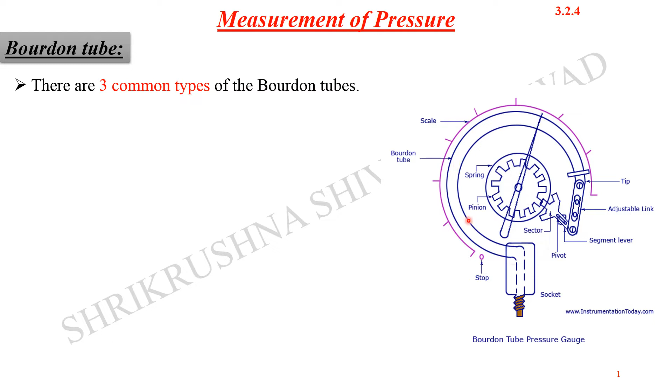In general, there are three common types of Bourdon tubes. You can see the schematic representation here, with the blue shading representing the Bourdon tube. There are three common types: the C tube, the helical tube, and the spiral tube.

These tubes are fabricated with metal alloys. Two metals are mixed together to form the material called an alloy, such as cold worked brass, phosphor bronze, beryllium copper, stainless steel, and nickel alloys.

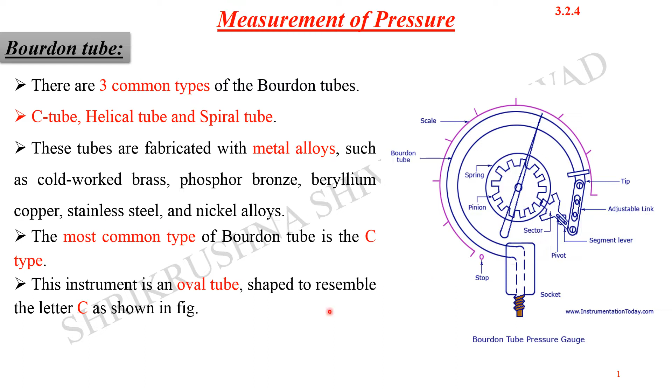The most common type of Bourdon tube is the C type, and in most cases it is a very useful kind of tube used for measurement of pressure. This instrument is an oval tube shaped to resemble the letter C, as we can see from this figure.

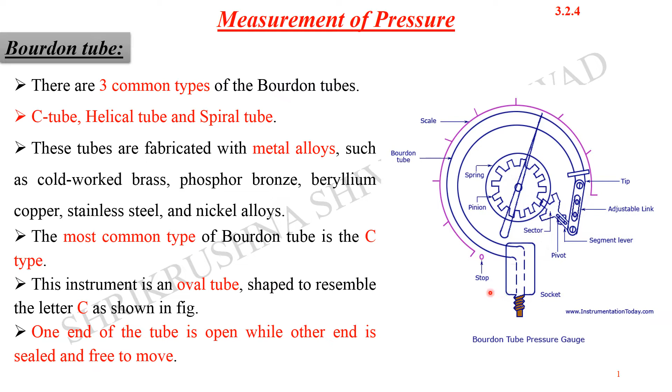Now, how does it work? One end of the tube is open and the other end is fused and sealed. The sealed end is free to move, while the other end is open, where pressure is applied. The open end is attached to the frame or transducer, and the pressure to be measured is applied there. So input is given to the open end of the tube, and the sealed end is kept free to move.

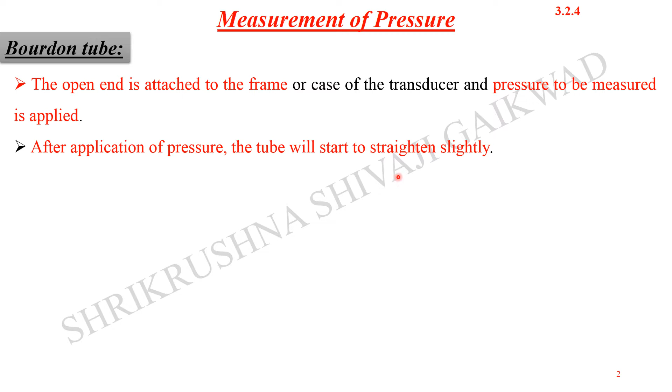After the application of pressure, the tube starts to straighten itself because pressure is coming from the inside, causing the tube to straighten. Or if the pressure decreases, the tube shrinks slightly. This mechanical response is related to the pressure formula - we know that pressure is force per unit area.

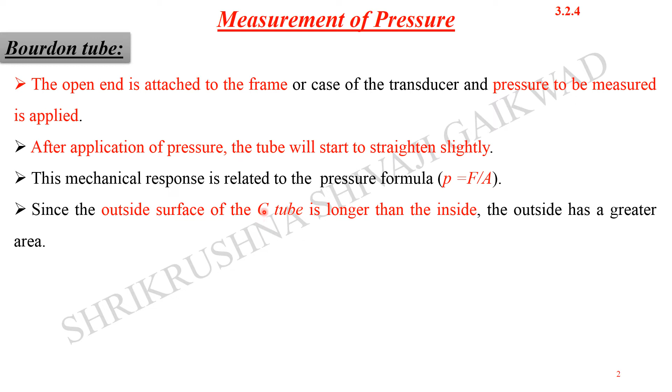Since the outside surface of the C tube is longer than the inside, we can see that if we consider the outside surface as longer and the inside surface as shorter, the outside has a greater area.

Consequently, the force exerted on the outside surface is greater than the force exerted on the inside, causing the tube to straighten. If area is more, then obviously more pressure or force will be required to have the same kind of pressure effect on the inside surface.

As the tube gets straightened, the sealed tip or sealed end will move, and the angular deflection of the free end is taken as a measure of pressure changes. So the angular displacement of the pointer, which moves over the calibrated scale bar, is considered as the pressure measurement.

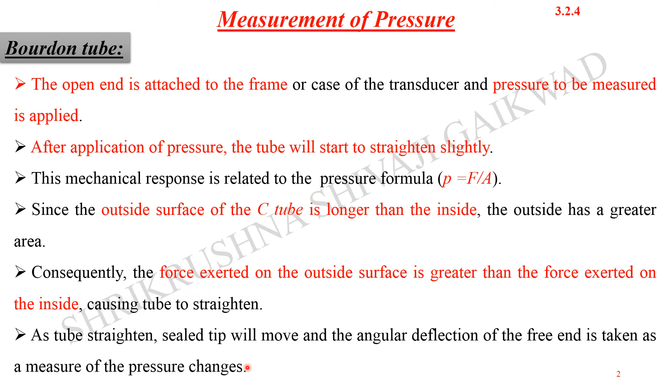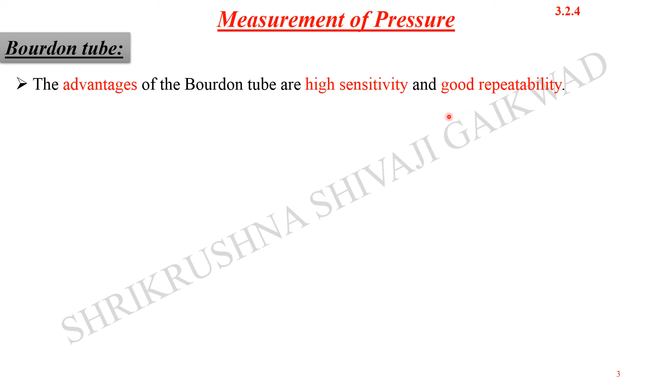The advantages of this type of tube are that it is highly sensitive and has good repeatability - we can repeat measurements over a large number of cycles.

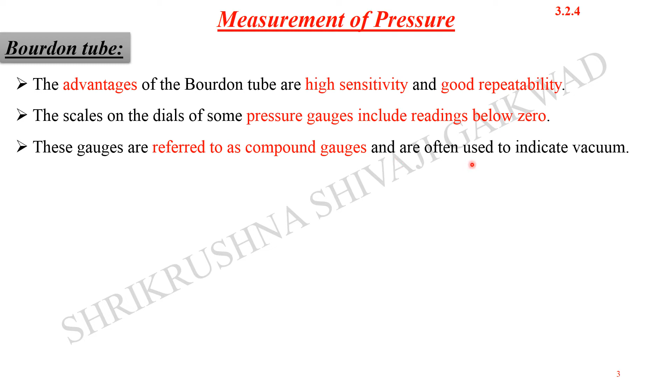The scales on the dials of some pressure gauges include readings below zero as well. These gauges are referred to as compound gauges and are often used to indicate vacuum.

So we can say the helix type has a large number of turns, and similarly one end is open and the other end is fixed or sealed. Its movement is attached to a pointer, which moves over the calibrated scale bar from minimum to maximum. Its shape resembles a coil.

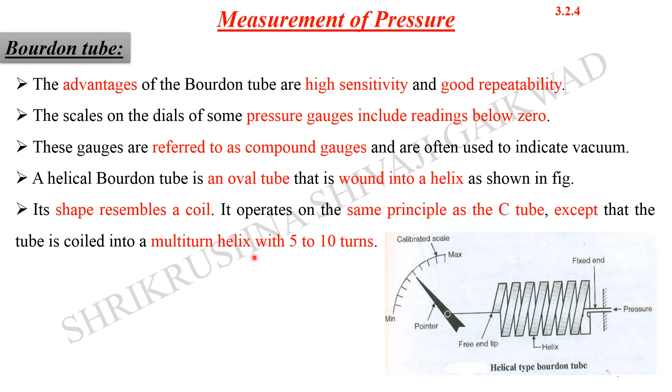It operates on the same principle as the C tube, except that it is coiled into a multi-turn helix, with turns ranging from 5 to 10. One end of the tube is closed and free to move.

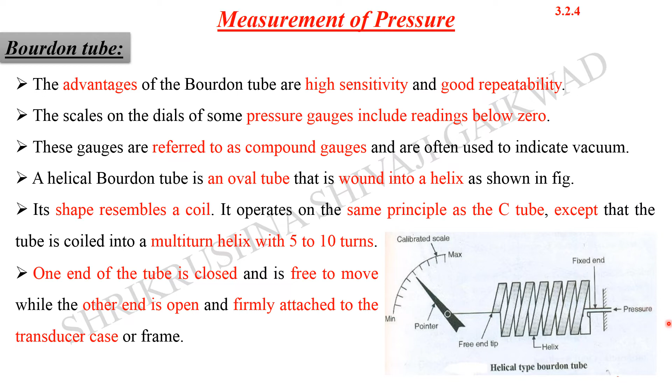The other end is open and firmly attached to the pressure transducer case or frame. The pressure to be measured is applied through the open end, causing the tube to try to uncoil or unwind, and the tip moves in response to this movement caused by the pressure.

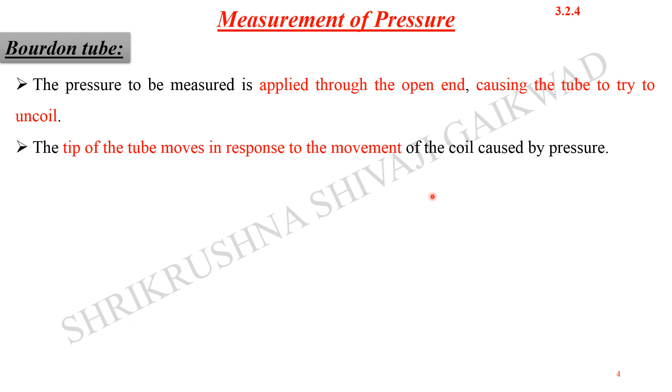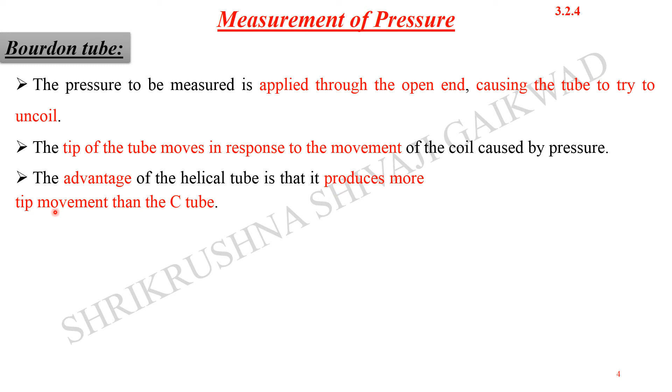As pressure increases, the coil unwinds and moves the pointer toward the maximum scale, in the positive direction. If the pressure reduces, the coil winds back and the deflection reverses. The advantage of the helical tube is that it produces more tip movement than the C tube.

Another kind of transducer is the spiral tube transducer. The oval tube is wound in a spiral. Earlier it was a helical path, but here it is a spiral one in a circular path, and as we go outward, its radius keeps increasing.

The tip of this tube produces more motion than the other two tubes. The radius of curvature increases with each turn, and the tip travel, due to its multi-turn configuration, increases depending upon the number of coils or turns used.

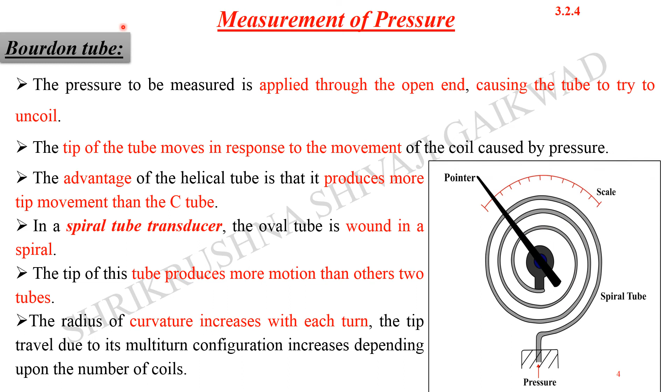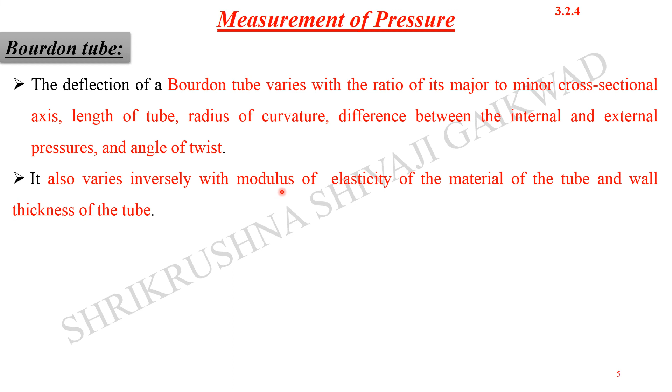The deflection of the Bourdon tube varies with the ratio of its major to minor cross-sectional axis, the length of the tube, the radius of curvature, the difference between internal and external pressures, and the angle of twist. It also varies inversely with the modulus of elasticity of the tube material and the wall thickness. For C type and helical Bourdon tubes, the angular deflection can be expressed by this formula: theta by theta0 equals 1.16 PR squared upon TEB.

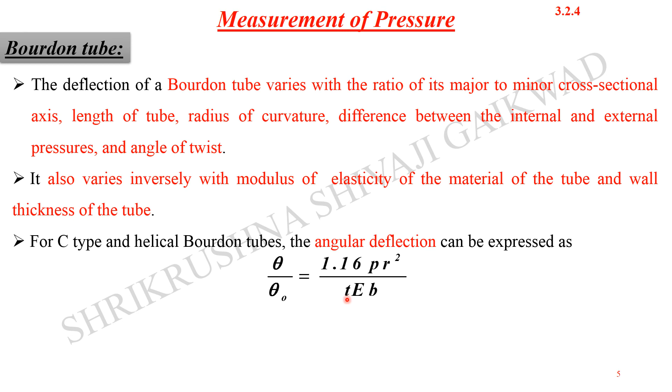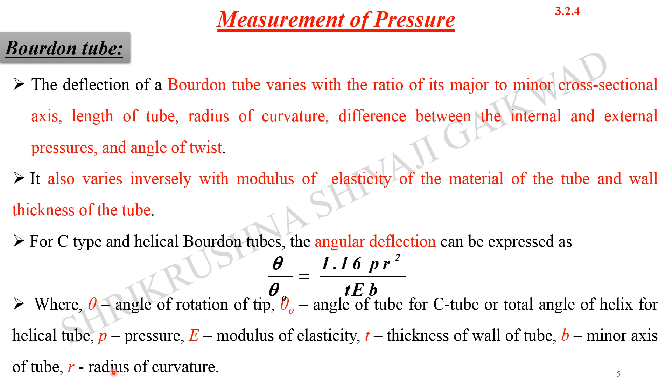Here, theta is the angle of rotation of the tip, theta0 is the angle of the tube for the C tube, or the total angle of the helix for the helical tube. P is the pressure, E is the modulus of elasticity, T is the thickness of the wall of the tube, B is the minor axis of the tube, and R is the radius of curvature.

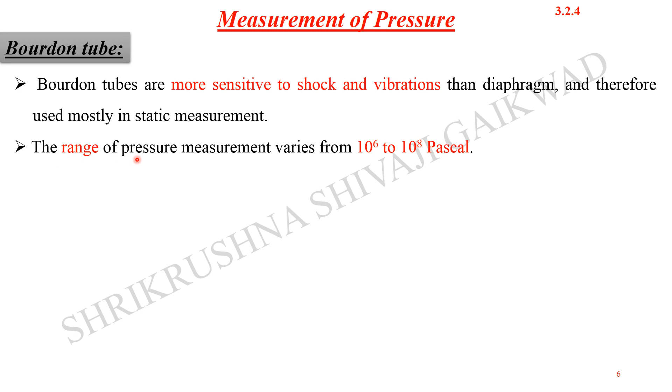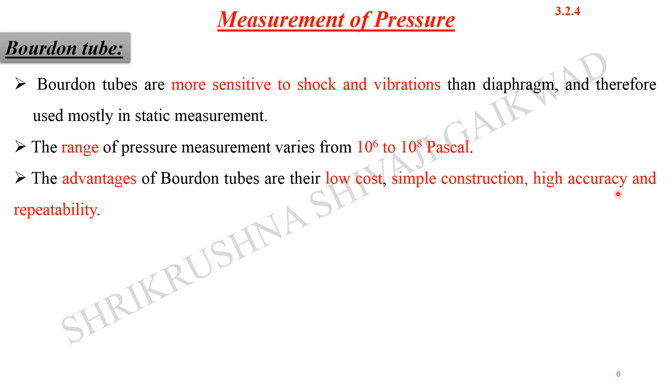Bourdon tubes are more sensitive to shock and vibration than diaphragms, and are therefore mostly used in static measurement. The range of pressure measurement varies from 10 raised to 6 to 10 raised to 8 pascals. The advantages of Bourdon tubes are their low cost, simple construction, high accuracy, and repeatability. Thank you.